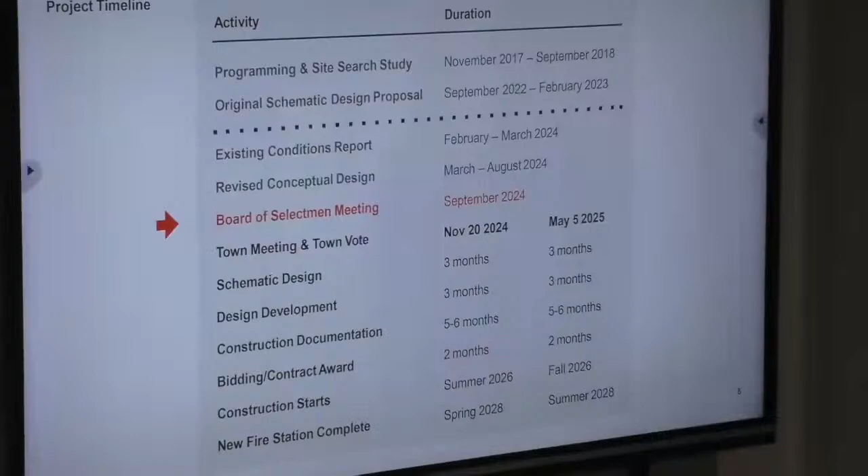Sure, so the work we've done thus far began back in 2017 with programming, then, of course, last year, the first schematic design proposal, and that ended in February. And then we began this effort in February of this year. So here we are in September. And beyond the September date are two potential paths forward, depending on when a town meeting and town vote would occur.

Thanks, Kyle. Yeah, so the purpose of this slide was to show that we've been talking about having a November special town meeting. We're going to have that on the agenda later tonight. I'm anticipating that you're going to vote to call that meeting. And as I put several of those schedules before you in prior meetings, it is possible, if you want to pursue one of these recommended projects, and put it before voters.

It is possible to do it at the November special town meeting, but I'm not recommending that, and I think our entire committee is not recommending that either. We think it's really better to wait until the spring town meeting in May. That'll give us more time to do a lot more outreach, hit all the different parts of the community that's interested in this project and engaged.

And as you can see from looking at the time frame, instead of starting in the summer, we're just starting a few months later in the fall. But I think those extra months will really be valuable to help us get good traction with the community. So that's the purpose of this. If we did it at spring town meeting, we could be looking at the summer of '28 for having it complete and moved in. Thank you.

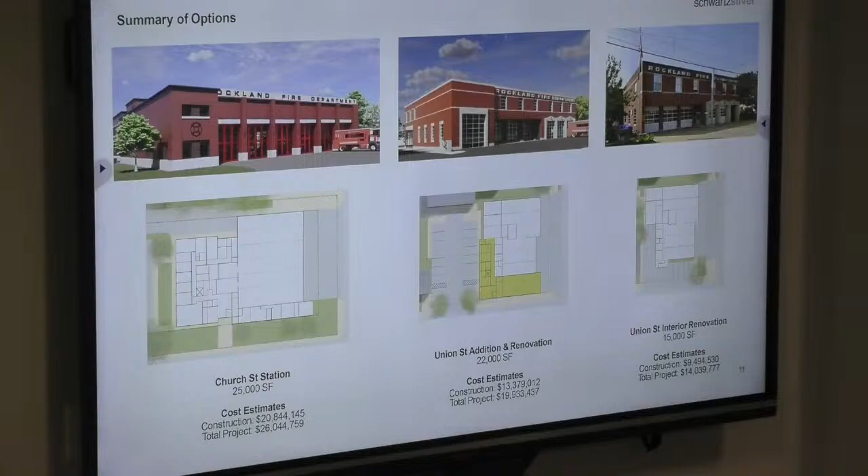So 3 options. On the left, Church Street, the middle, the addition to Union Street, then on the right, the interior renovation at Union Street. And we'll go over the cost estimate summary in a moment, but for total cost of the construction, on the left, working with our cost estimator, came in around 21 million. The middle one came in around 13.3, and on the right came in just about 9.5.

So we'll begin at Church Street. So it's really important for us to begin comparing where the previous study left off and where we began. So in the previous study, which I guess February of last year, the total square footage was about 33,000 square feet. And working really carefully with the original programming documents that Bob Mitchell helped put together, and with the chief and Doug, we were really able to squeeze out all the excess and get it down to a little over 25,000 square feet, which is a reduction of about 22%, which takes up a little less than half of the Church Street site, versus almost 2/3.

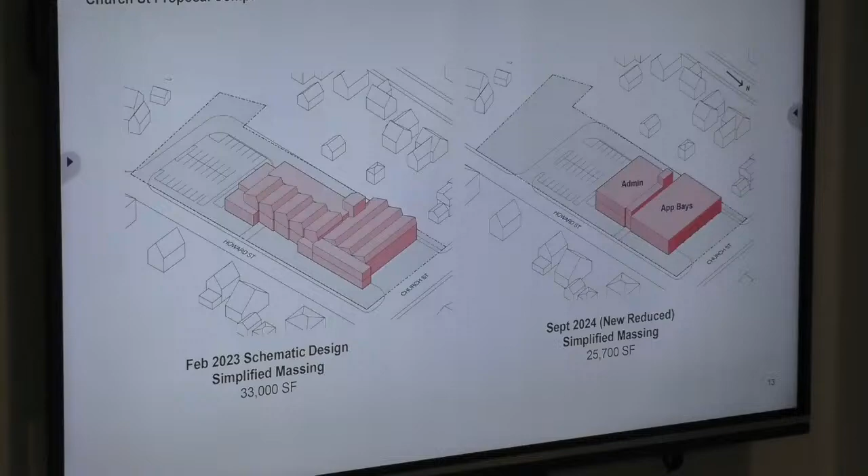And then other things like reduce the articulation of the building. There's a lot of costs associated with like the skylights of the old one, so we just tried to reduce it and make it simpler.

You want to add, John? No.

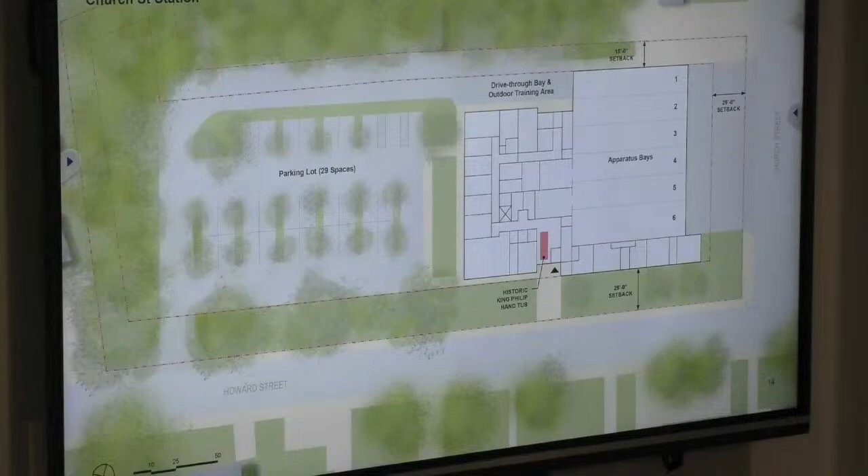It fits. We're trying to make it fit into the neighborhood. The trees extend from the surrounding landscape, and the setbacks. Again, the building doesn't go into the setbacks. And creating a buffer between the parking and the rest of the neighborhood, and even landscaping the parking. So it becomes a little more sensitive to the site that it's going into. Yeah, I'll show that in a minute in the aerial.

In addition to making this a much tighter plan, working with Bob Mitchell, the square footages for each room are as small as they really can be. And they're as small as they can be because we actually put the required furniture in each of these rooms and made sure we had clearances around all the furniture. So these rooms are really tested with the actual equipment and furniture that needs to go in them. And yeah, we also like it, in the sense that the rooms are not generous, but they're efficient.

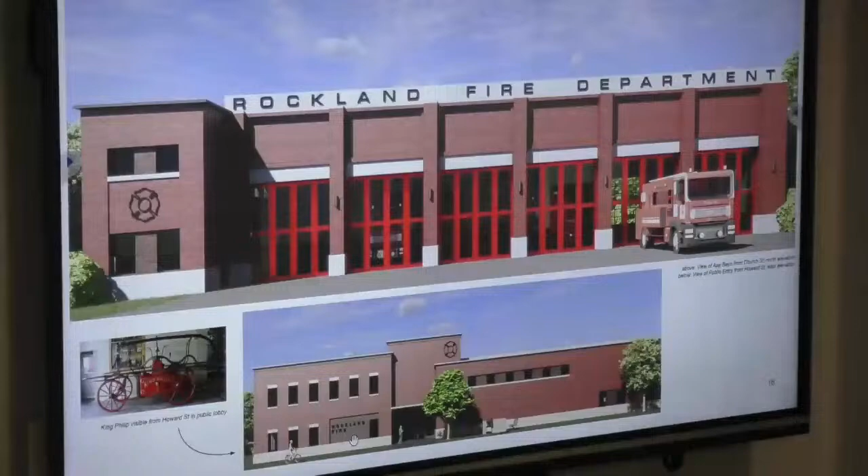Then the bottom is the view from Howard Street, which is where the main entrance would be, where the sign is. And then one thing that was important to the fire station committee was that King Philip be on display. So one thing we kept in all options, or at least one of the first two options, was having that visible on Howard Street. Can you show where that is in the elevation? Yeah, sure. That would be in this front entrance. Yeah, and that would be a glassy entry. It's looking very dark in this image, but it would be kind of glass and open to the lobby inside.

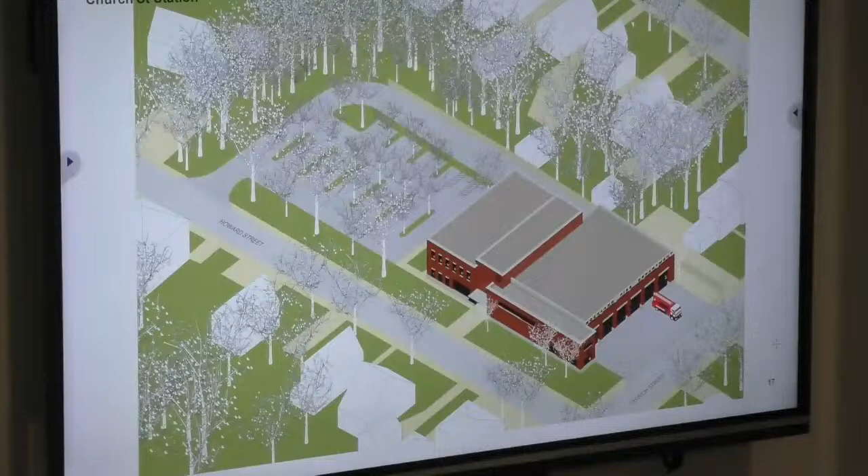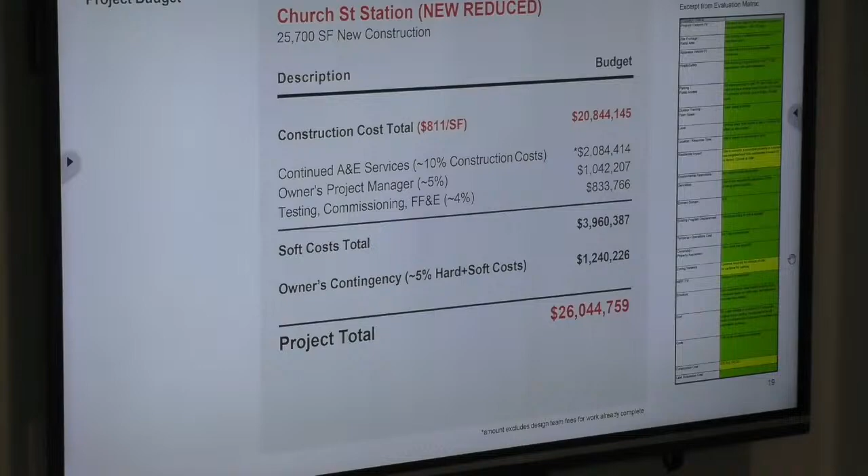The middle option, which is the addition to Union Street, again, that one came in around 13.3 for the total cost of construction. We tried very hard at the beginning to see what we could fit on that site. As you all know, it's a very tight site right in the middle of town. So the one option that we pursued with an addition wraps around the edge, and it would require taking the site behind it, 11-15 Pacific Street, which, I don't know, Doug, if you want to speak to this now, but that would require a much longer conversation.

Yeah, so this, I think, certainly adds a little something more to the station. As Kyle said, there'd be one bay that could actually accommodate the large apparatus. But the only way to do an addition, we have to comply with zoning, we need parking, et cetera. So there are one or two multifamily apartment buildings behind there. So there would have to be some sort of taking if we were going to pursue something like this, like a friendly eminent domain taking.

And we can talk more about that if this is an option you want to pursue, but we did have a rough estimate for what the damages would be, the cost of acquiring that property, because even if you take something by eminent domain, you still have to pay damages. And just by looking at the property record card, it was close to $1 million in today's dollars. So that's going to add roughly $1 million to the cost of the project, but that is factored into the numbers. Thanks, Doug.

And I'll just add one thing. We tried many options where that wouldn't be the case, but to build on the site, we were required to include parking, and this is what we could fit. And this station, by adding to it, the total square footage just becomes about 22,000. So it'll never be as big as a Church Street site would. And a lot of that difference actually is just in the apparatus bays. So the space around the bays, the living quarters, and the storage is almost the same. It's just the lack of clearances around the bays that make up that difference.

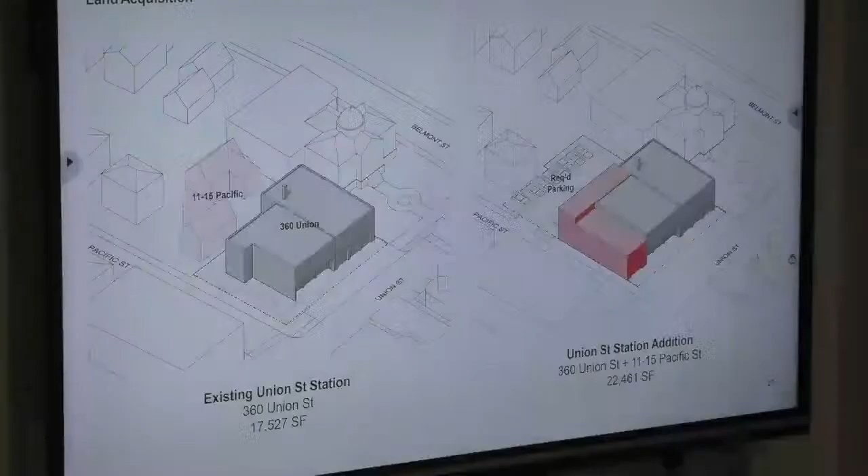This is a site plan of this option, Union Street at the bottom, Pacific Street on the left. The yellow, again, is the addition. So on the right is the 1938 station, the '78 addition, which are bays 4, 5, and 6. And then our new 7th bay, which again would be that full-size bay, would be on the left, and the back would be the front entrance, and a new row of offices right now, which are not accounted for, or upstairs in the gathering space.

But this is actually kind of a good slide to illustrate the difference between the modern standards of an apparatus bay, bay number 7, versus the bays that exist in the current station. You can see how much wider it is because of the truck clearances and the safety needed clearances around the truck, but also the depth of the bay. And that is a minimum depth bay. It's smaller than the bays that we would propose new.

And just like the eminent domain question, this question of clearance or of building in this tight site, which per zoning we're allowed to build to the lot lines, we would want to do a deeper study into making sure that the turning radius could happen, the utilities could be moved as they would be required to move. Because as you all know, there's already a traffic light that stops traffic when the apparatus pulls out. So this would be a very difficult site to work in, but nevertheless, we think something is possible. And then, of course, the parking lot at the top, as mentioned before.

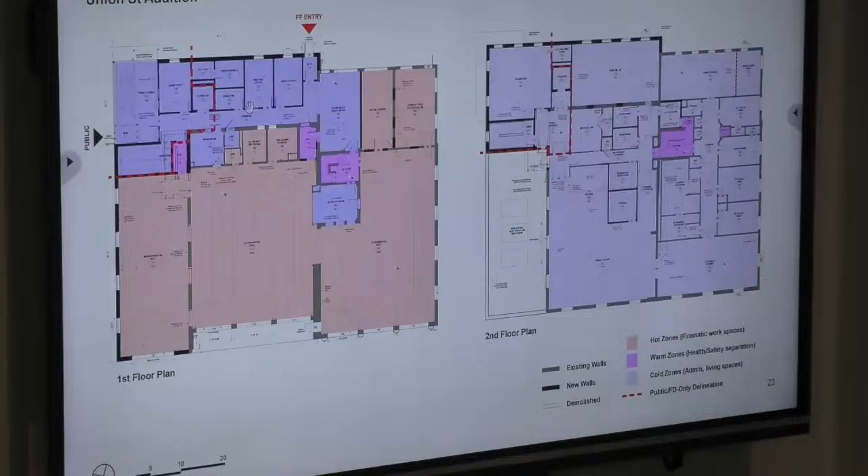And like the first option, we have this red line indicating where the public can access. So there's a little public entrance here in the black, and then a separate firefighter entrance, again, just for separation as desired by the firefighters. Here, the public could access the main lobby, which would have King Philip on display, access to an elevator, which would take them upstairs to the training room / community room where meetings like this could happen, in addition to a lobby or an administrative office. And right now, the administrative office is directly off of the apparatus bay, which means the administrative assistant has to walk through the diesel fumes.

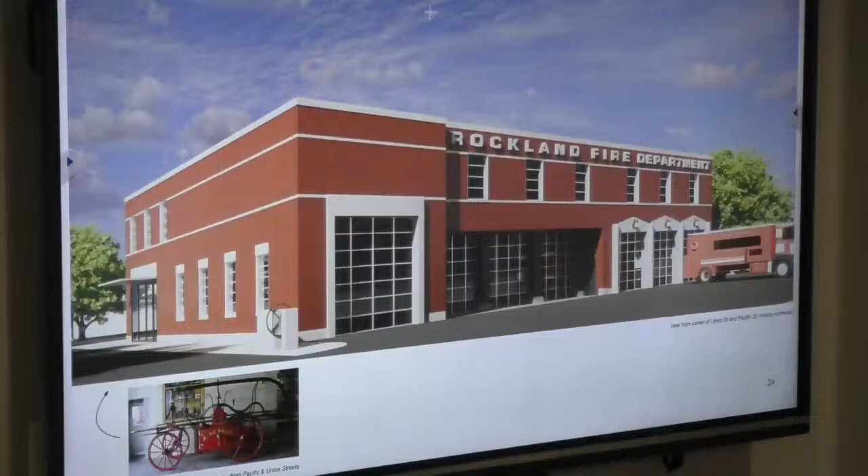And this is a view from the corner, Pacific on the left, Union on the right, looking at one version of what that new bay could look like. In this image, we've kind of kept the language of the existing building with the brick and the granite. One thing just to bring up on this is with this design, while we may gain a larger bay off of Union Street, we lose the back bay off of Pacific Street, which is still utilized during the winter for vehicle storage.

Thanks, Chief. And yeah, you'll see that in the last option we'll show in a moment. And this is just the aerial view of that option with the parking lot in the back. And one thing to point out here, we will never be able to fix also that ramp depth, the depth from the face of the building to the street.

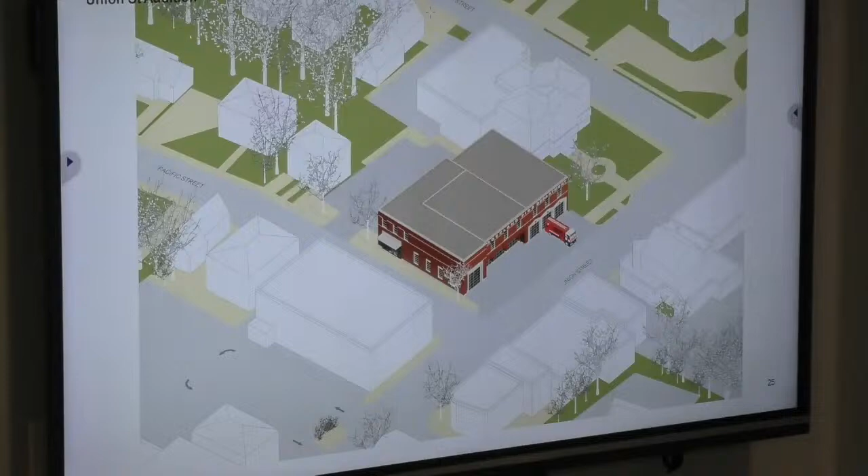So that'll still persist. Yeah, we still want to be able to fully take our ladder truck out, set it up. Currently, if we want to do any training with the ladder truck, we usually go down to the plaza, down to the Calvary Chapel Plaza. Maybe there's a potential that we could set it up at the rear yard, but now we're backing it in between vehicles. So, yeah, we still lose that space out front to do some training.

And this was the estimate for this option, which came in around 13.3 for the construction cost. That's a little under $600 a square foot. And then these were initial percentages to estimate a total cost of construction.

One thing that's really important to point out is this 1.7 number, which applies to this option and the third option, which is a temporary operations facility, which means the station is being renovated. We have to build a kind of temporary station elsewhere, which we got priced to be on the Church Street site. We've done this at Walpole and other stations. It's a temporary facility, but it's not small, so the estimate for that was 1.7, and you'll see that number again for the third option.

And that probably doesn't include the cost of heating it, because they're tents, right? So you have to blow hot air into these things to keep them warm in the winter. So these are costs that you don't get back. You spend $1.7 million, and it's money that you're not getting back in a permanent building ultimately.

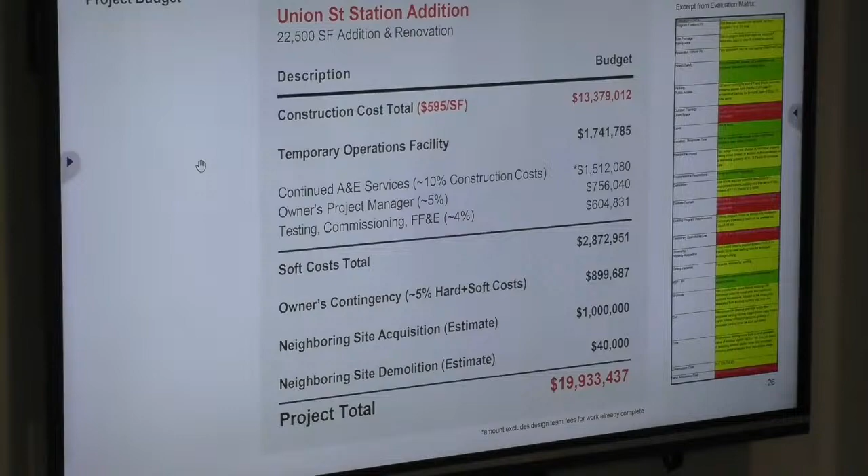Essentially the temporary facilities would consist of a larger tent-like structure for the apparatus, trailers for the firefighter living spaces, and trailers for administration work, to relocate the admin offices. And then, as Doug mentioned at the beginning, there are two estimate numbers for the acquisition of the neighboring site and the demolition of that site, and that's what all adds up to get that roughly $20 million total project cost.

Then our third option, which is just the interior renovation. So if the first option was 25,000 square feet, the middle one was about 22, and the third one's obviously the same station it is now, just reconfigured to try to be safer, create safe separation. So just a couple notes on the site. We would do necessary repairs around the entrance to the bays, try to preserve as much as we can with the memorial and the tree in the front.

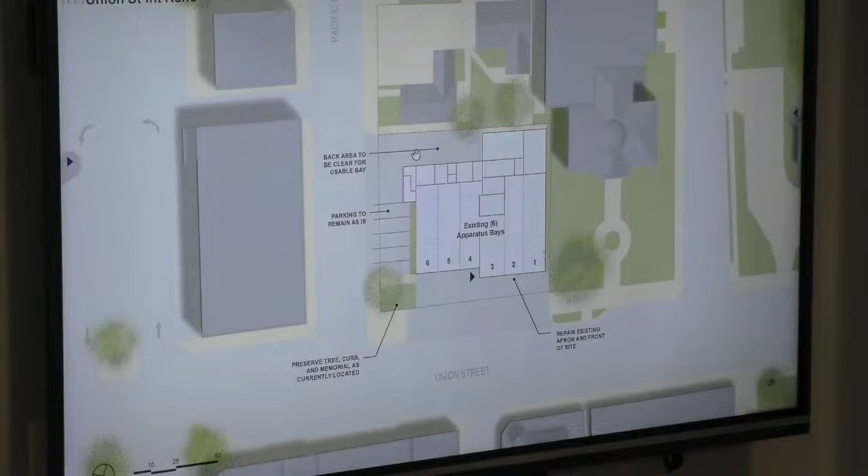The parking is going to remain as it is, and then per the request of the Fire Station Building Committee, we've tried to make the back bay, as you'll see in these plans, a usable bay. So that's this bay up here, as opposed to being part ready room, part storage. In which case, this back area would now need to be used for proper apparatus or truck moving, so it wouldn't be parking for the firefighters.

So in this case, there's no public entrance arrow because there wouldn't be a proper public entrance. There would be at least a safe public entrance, which is where this black arrow is, adjacent to the admin office. But the main thing we tried to do in this plan was just create safe separation between the spaces. So in this case, the administrative assistant can go to work without having to walk through the fumes of the bays.

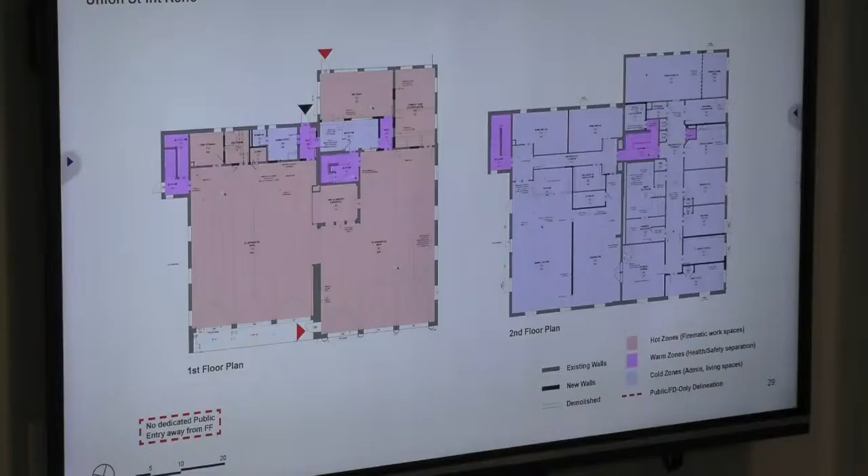Upstairs, without getting into it, we just tried to be more strategic with how we divide up the offices and give the training room at least its own area. That's this area here, as opposed to Chief Duffy and the team having to move chairs and stretch partitions around the room. And then the estimate for that came in around 9.4, 9.5 for the construction cost, and then there's the temp ops cost again, the 1.7, which ends up being about 14 for total project cost.